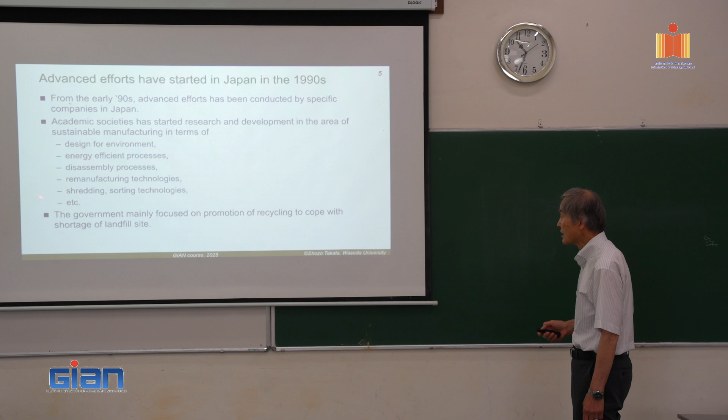This is just some of the history, but I started this research work in this field through the presentation of Professor Alting. He is a professor at the Technical University of Denmark, and he made a very interesting presentation in 1993 at CIRP, the International Academy of Production Engineering, titled 'The Life Cycle Concept as a Basis for Sustainable Industrial Production.'

He stressed the importance of the life cycle approach, which implies that products are planned and developed for all life cycle phases: production, distribution, use, and disposal, before production and marketing. This is the same concept as I told you in terms of life cycle development or life cycle planning on Monday, and this presentation was quite inspiring.

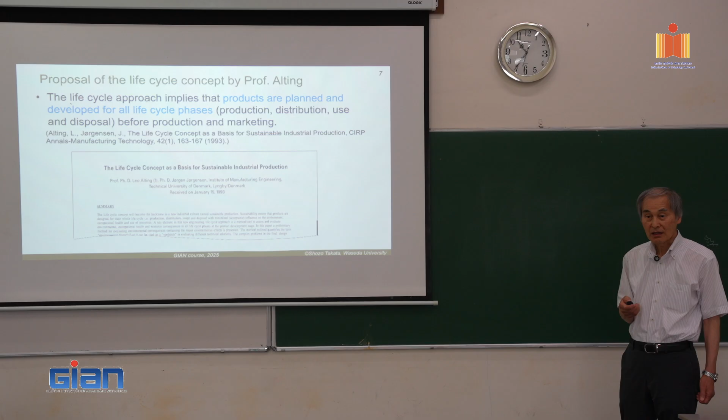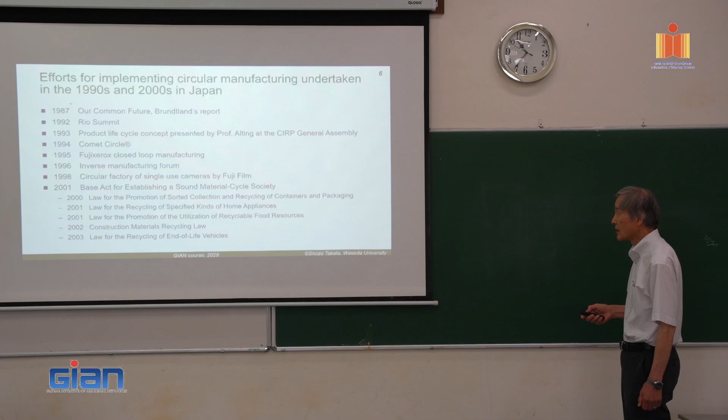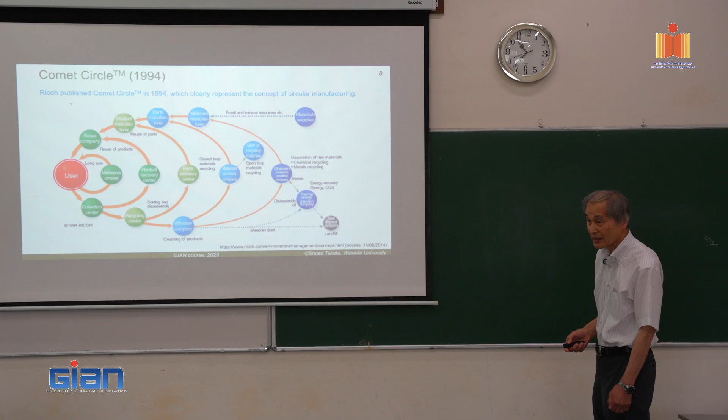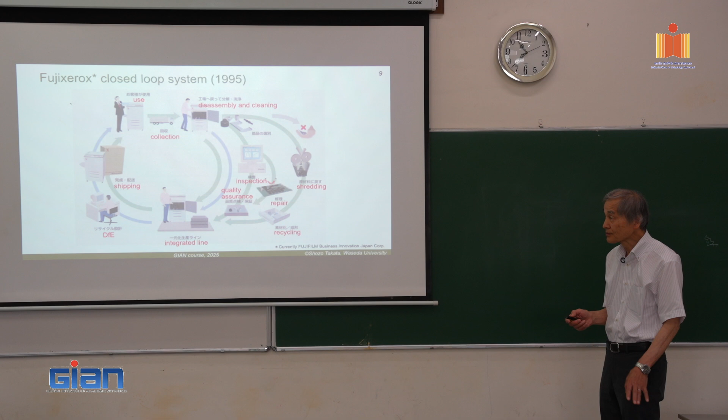Also, already in 1995, I showed this chart already, but Fuji Xerox started to reuse the parts used for producing new products. And in the area of research institutions or universities, the so-called Inverse Manufacturing Forum started in 1995 in Japan.

Inverse manufacturing means you put an inverse path in addition to the forward path - the same concept as the linear process, where you add a return process to make the loop. In this Inverse Manufacturing Forum, we conducted a lot of research works, such as design for environment and so on, as I told you already.

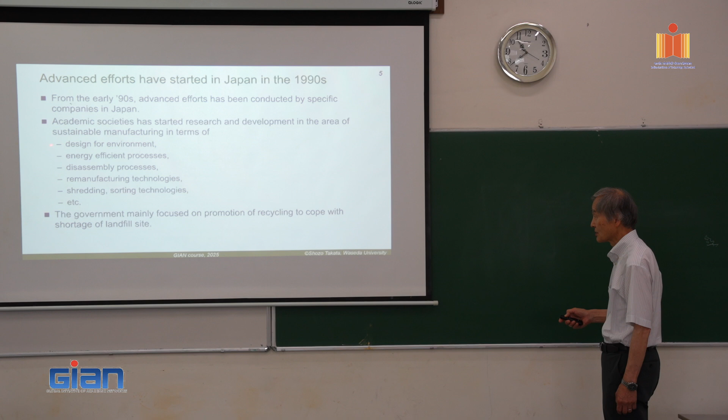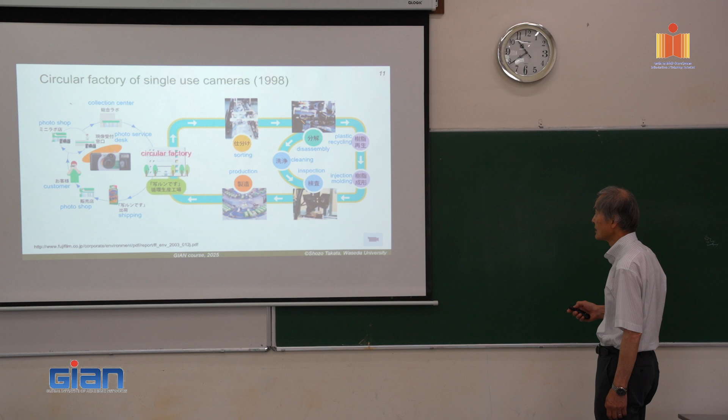This also, I showed this chart already. This is the example of the single-use camera, and the automatic recycling or reuse manufacturing factory was established in 1998.

In industry or in the academic field, we didn't only think about recycling but also reuse. So we said that 3R is a very important concept: reduce, reuse, and recycling, as you know.

But the most important issue at that time for the Japanese government was the shortage of final landfill sites. This shows the final disposal volume for 1980, 1990, with 1991 as the peak. In this period, the final disposal volume increased quite steadily. The problem was that the remaining years of the final landfill site at that time, in 1990, was only 1 year or 1.5 years.

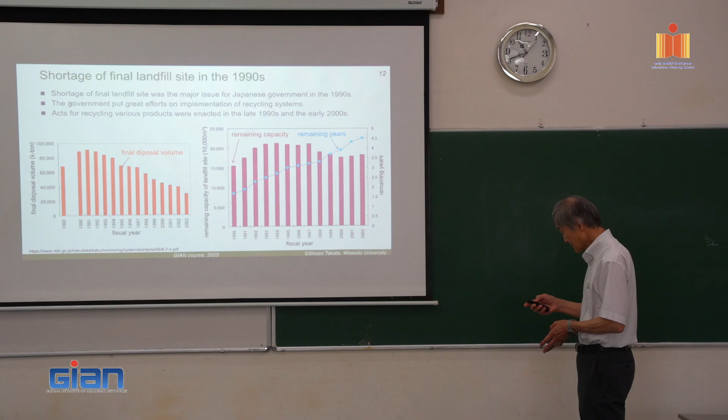This was a very serious situation at the time. Therefore, the Japanese government put a lot of effort into reducing the amount of disposal and saving the landfill site. For this reason, the Japanese government established a legal system called the Sound Material Cycle Society.

What they made was the legal system of material recycling. They set different kinds of acts, such as the Containers and Packaging Recycling Act, Home Appliance Recycling Act, Food Recycling Act, Construction Recycling Act, Automobile Recycling Act, and Small Home Appliance Recycling Act. These were established in the late 1990s or early 2000s.

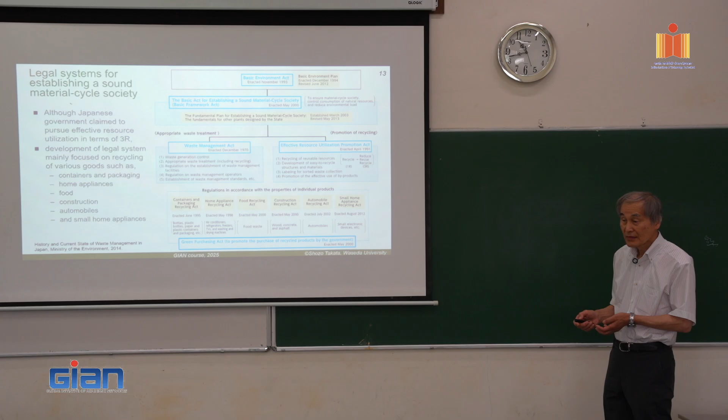So this is a chart explaining what the Home Appliance Recycling Act is. This act applies to what we call white appliances, including air conditioners, refrigerators, washing machines, and TVs.

The system works in this way: the consumer has to buy a so-called recycling ticket from the retailers. That means when they discard their appliances, they need to buy a recycling ticket and ask to take their machines. For these four appliances, almost all households have a TV, air conditioner, washing machine, and refrigerator.

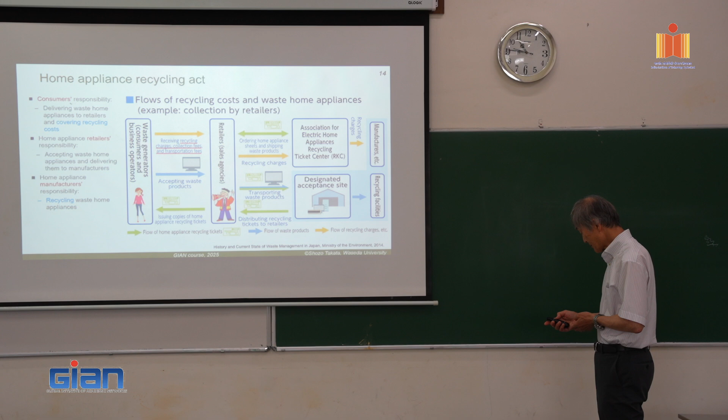Before the start of this system, a pilot recycling plant had been established to test the way of recycling such things as refrigerators and so on.

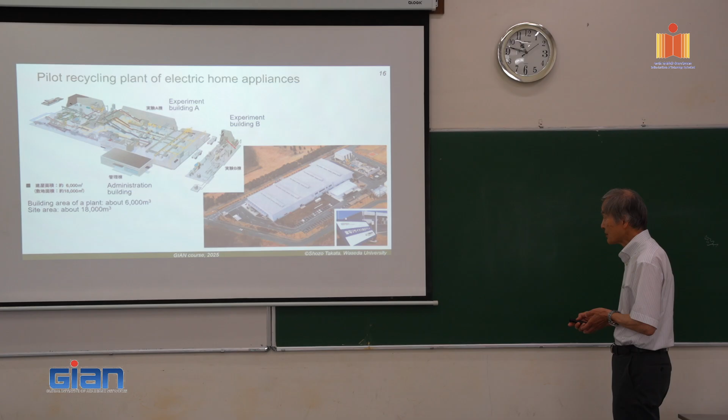So these are pictures of one of the recycling plants. For example, this is a quite old LCD TV, and the design was not so well suited for disassembly. There are so many screws, but they had to unscrew every one and take out the hard disk. This kind of circuit board contains precious metals, so it has to be recycled separately from the covers made of plastics and so on.

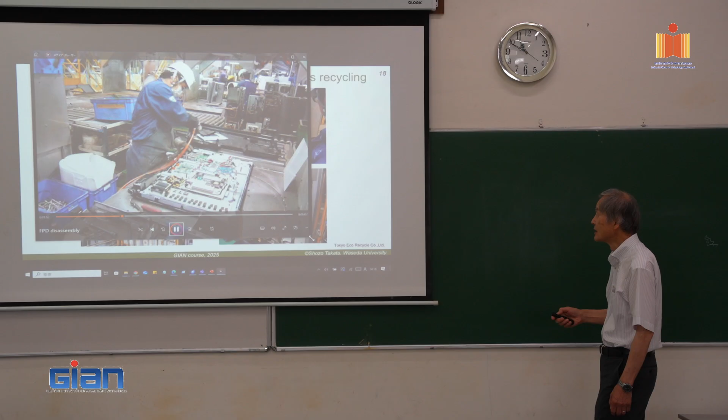This video is a bit old, so nowadays the new machines are disassembled differently, and some companies have developed automatic disassembly systems using robots. The robot recognizes the screws and unscrews them automatically. There were so many circuits and electronic components inside the TV at that time.

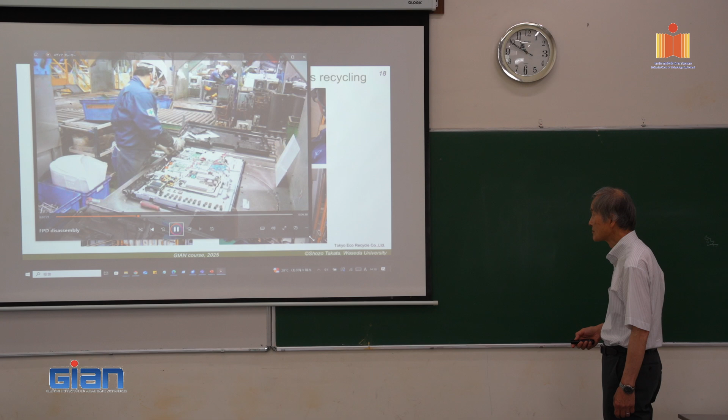Sorting is quite important for recycling. If you sort very well, then you can get more useful material.

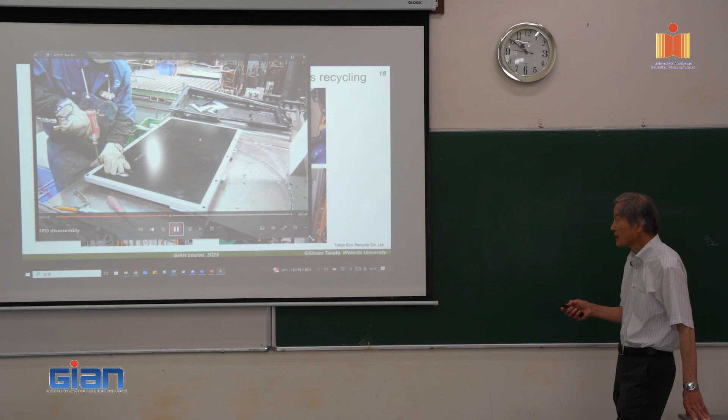You know that at that time the backlight of the TV was not LED, but used this kind of light - fluorescent lamp, how do you say it...

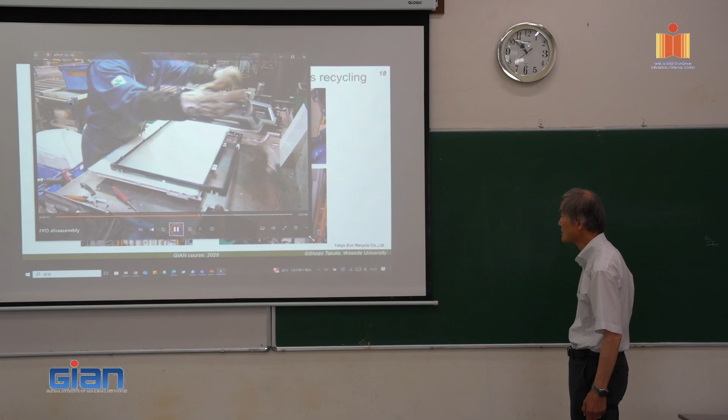These are the lights, very thin. I don't know the English word, sorry, but this kind of light. Nowadays TVs don't have this kind of light - LED is used for that purpose instead.

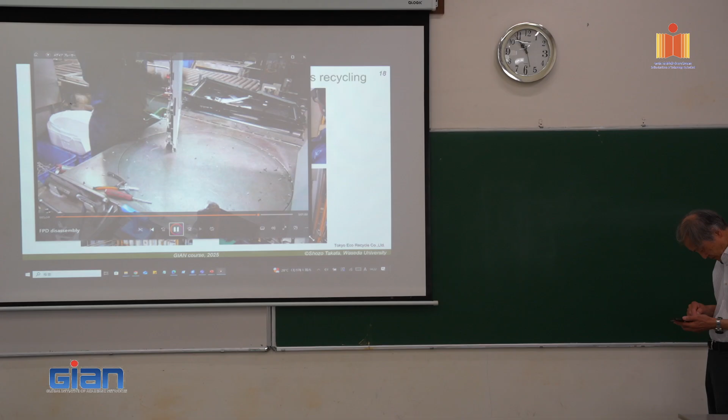Fluorescent lamps. Okay.

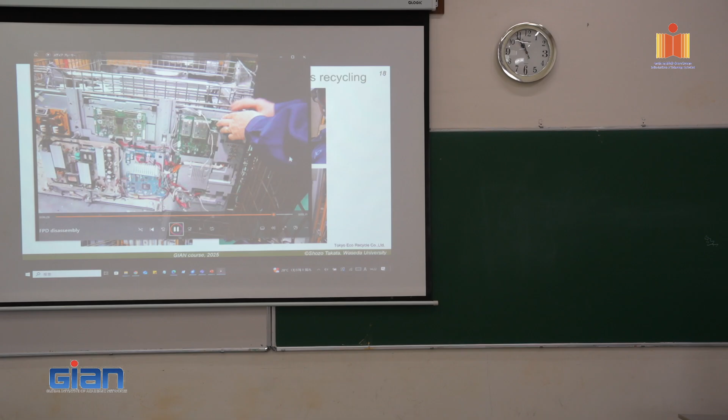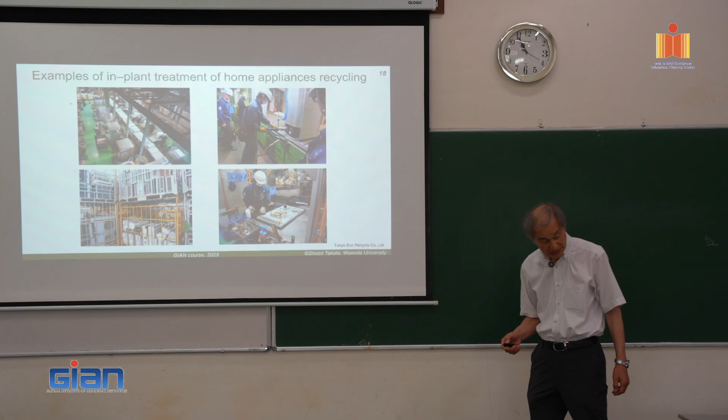In this case, you have to pay the recycling fee when you buy your car. The money is deposited, and then at the end of the car's life, there is a certain institution that reserves the money, and the manufacturer should recycle the car and can get the money from that control institution for this purpose.

So the way of paying is different from the case of home appliances - I don't know the exact reason why. One is paid first, and the other is when it's discarded. But anyhow, the system is a bit different between them.

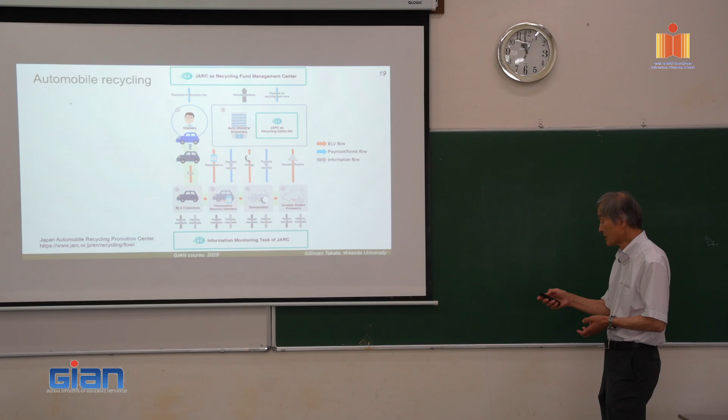So by these efforts, the total generated waste and waste generated per person per day decreases significantly in these days. So nowadays, we could solve the shortage of the landfill area in Japan.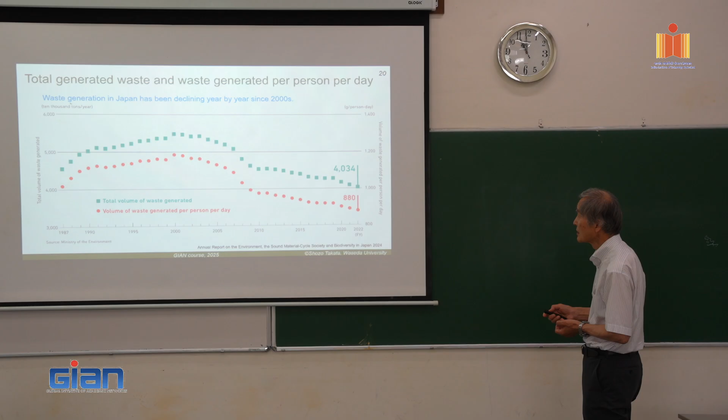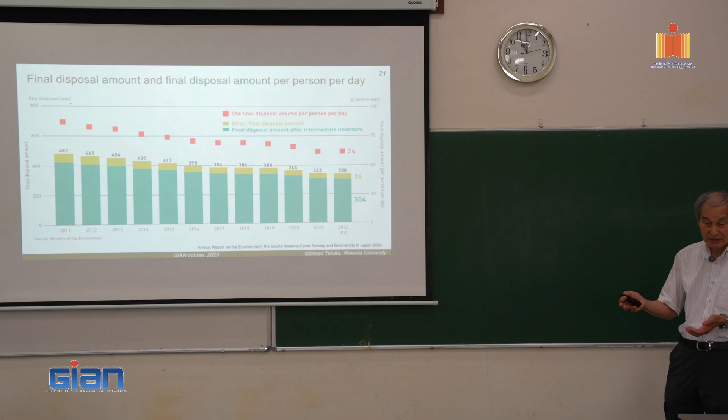This shows the final disposal amount and the final disposal amount per person per day. That was the total generated waste, and this is the final disposal amount. But anyhow, both are decreased significantly thanks to the effort to introduce the recycling laws.

But the efforts of introducing circular manufacturing or material circulation in Japan has already achieved, although Japan has achieved a significant reduction of waste, our effort toward 3R has stagnated in the late 2000s and early 2010s.

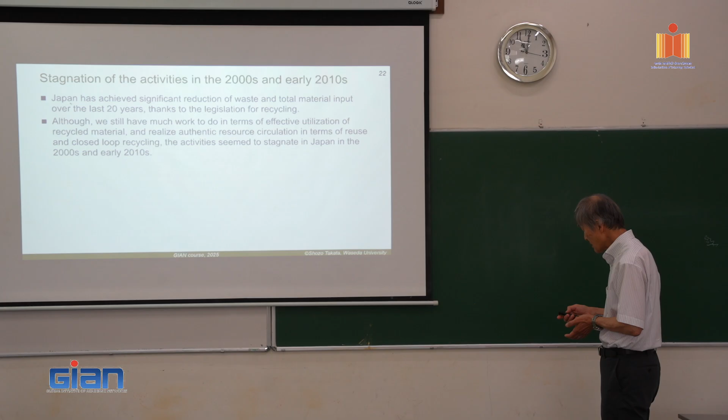Maybe the reason was that the concept of 3R and circular manufacturing had been successfully implemented in several types of products, such as single-use cameras, copiers, and construction machines in the 90s. Such advanced effort on circular manufacturing has not spread widely in Japan after that.

The reason why the above-mentioned examples have been successful in implementing circular manufacturing is that their businesses originally incorporated characteristics suitable for circularity.

So, about the single-use camera, I already told you that the product automatically comes back to the shops, and the shops can send the collected cameras to the factory.

And also, in the case of the copier, maintenance is quite important to maintain the quality of the copy. So that is one important characteristic of this kind of product.

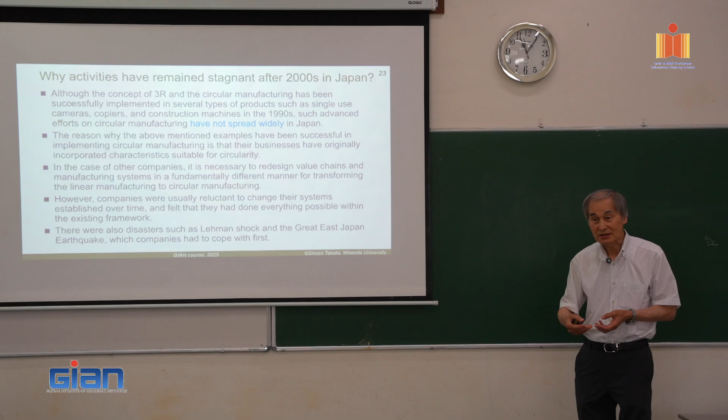And maybe there are also disasters such as the Lehman shock or the Great East Japan earthquake, which companies had to cope with first.

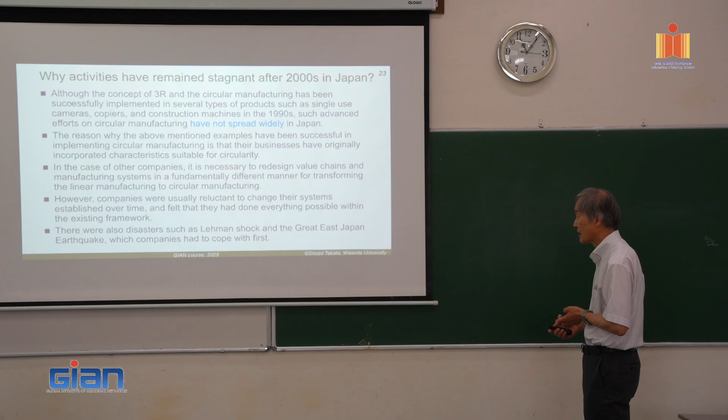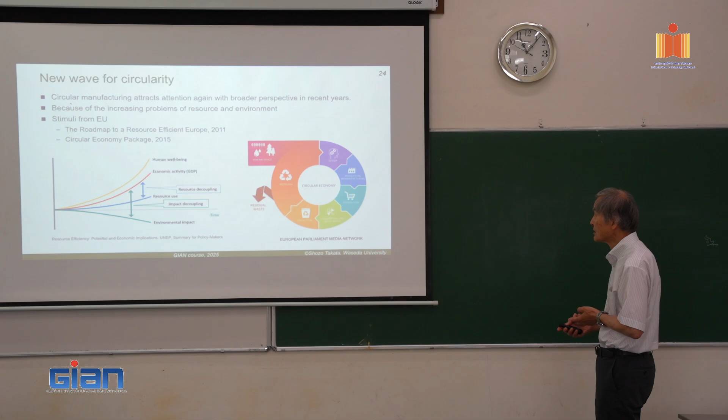But as you know, in 2015, the EU proposed the so-called circular economy, and they are claiming that decoupling is quite important for us. And this changed the mood of companies in Japan.

For example, in October 2020, the Japanese Prime Minister declared Japan's aim to reduce GHG emissions to net zero by 2050. This declaration brought a change of mood in Japanese industry. Companies are trying to make various efforts to contribute to the reduction of carbon footprint and resource consumption.

Although many companies begin to understand that they need to change their business models and value chains to introduce circularity, unfortunately, they are still struggling to find a way to transform their businesses.

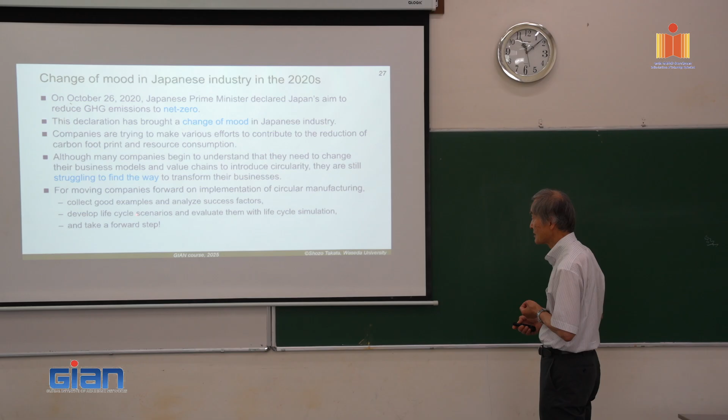For moving companies forward on implementation of circular manufacturing, we collect good examples and analyze successful factors. You need to learn from the good examples or cases, analyze successful factors, develop life cycle scenarios, and evaluate them with life cycle simulation, and take a forward step. So these are our hopes, but for many companies it is still not an easy path.

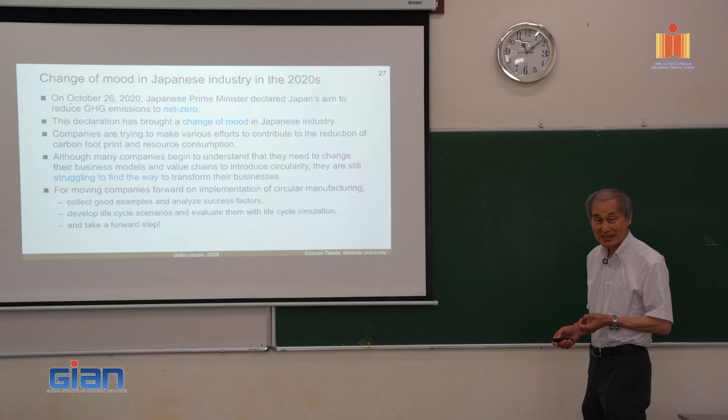Okay, so this is just a current situation in Japan, some material data. If you look at the material flow in Japan, this is 2000 data, and this is 2021 data. The total material input, including everything, reduced by 33% from 2000 to 2021.

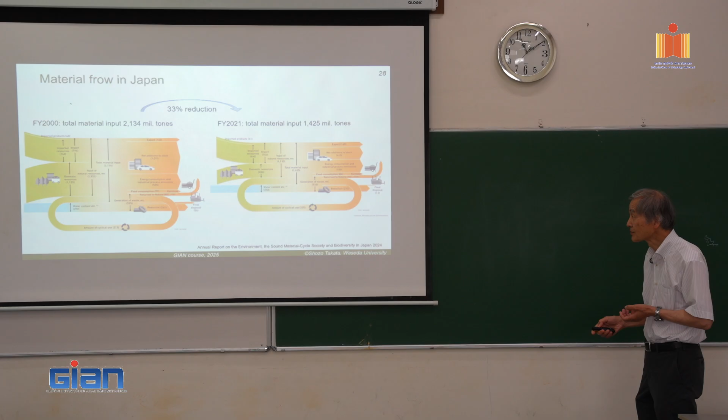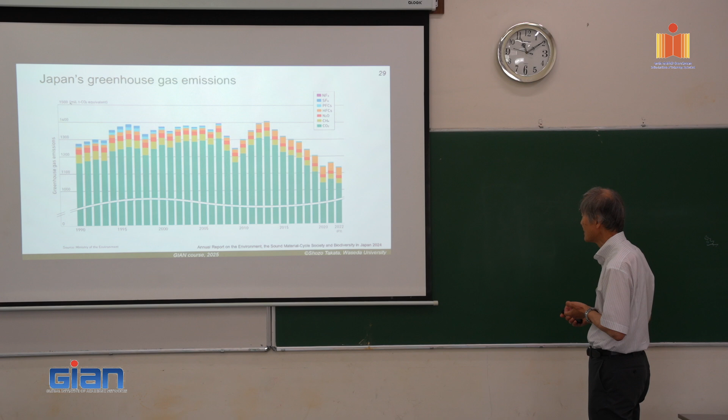If you look at the GHG emission, we could also reduce it significantly in these days. Energy-related CO2 emission by sectors: if you look at the industry sector, they made a lot of effort to reduce the energy-related emission. But the transport sector, the commercial and other sectors, the residential sectors, and the energy conversion sectors are still not so successful in reducing CO2 emissions.

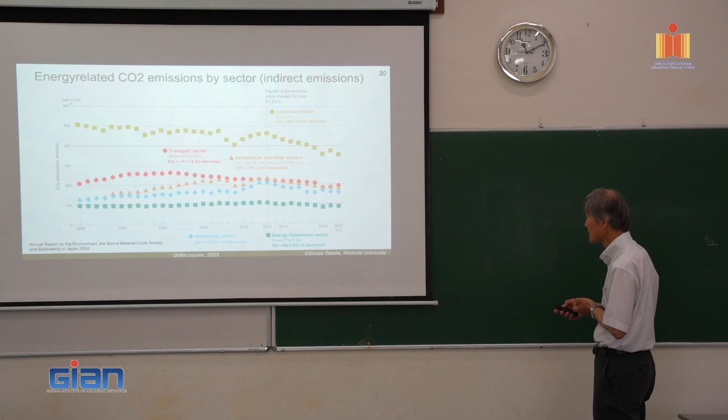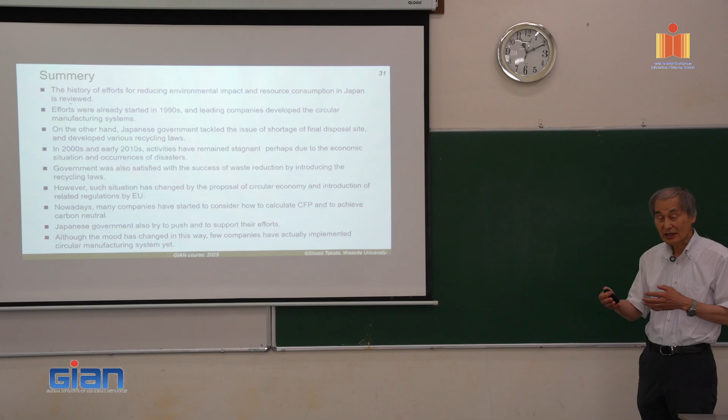So what I want to say is that in general, we made a lot of effort, and from certain aspects we are successful in reducing waste, reducing CO2 emissions, and so on. But still we need more effort to introduce circular manufacturing to cope with resource depletion and global warming.

So in summary, the history of effort for reducing environmental impact and resource consumption in Japan is reviewed. Efforts already started in the 1990s, so it is not a new issue. It's not old, but a long-term issue. Leading companies developed circular manufacturing systems quite successfully. On the other hand, the Japanese government tackled the issue of shortage of final disposal sites and developed various recycling laws.

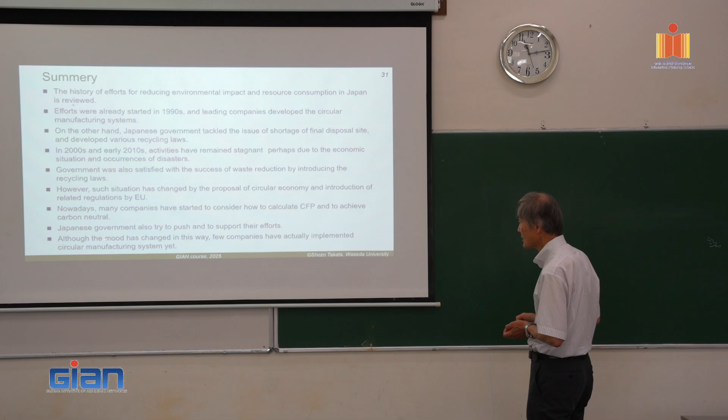However, this situation changed with the proposal of circular economy and the introduction of related regulations by the EU. Nowadays, many companies have started to consider how to calculate carbon footprint and achieve carbon neutrality. The Japanese government also tried to push and support their effort. Although the mood has changed in this way, few companies have actually implemented circular manufacturing systems yet, so we need more effort.

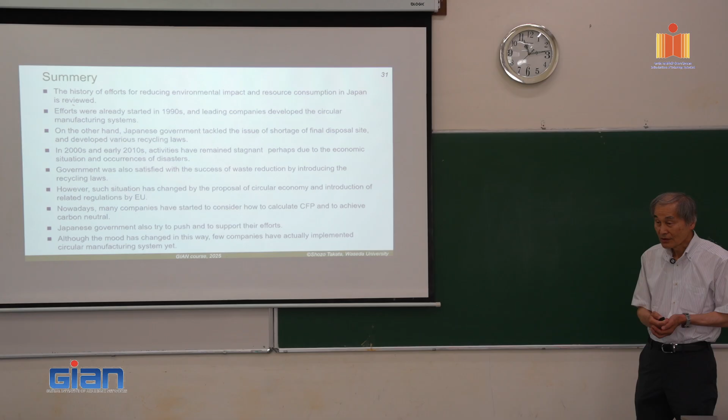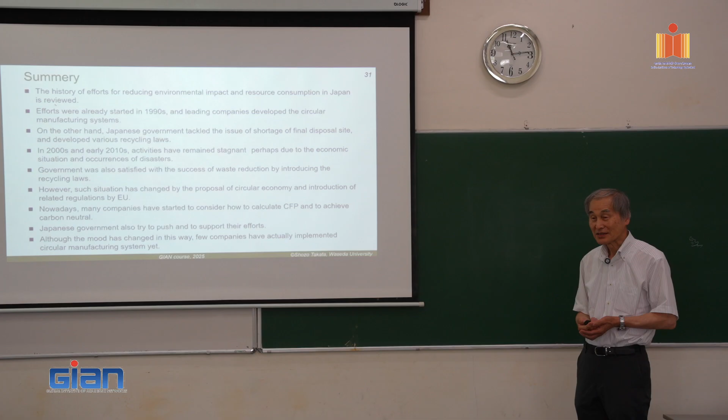Okay, with this I'll stop my presentation, and I appreciate your attendance to this course and for giving me a chance to explain circular manufacturing from different aspects. Thank you very much.

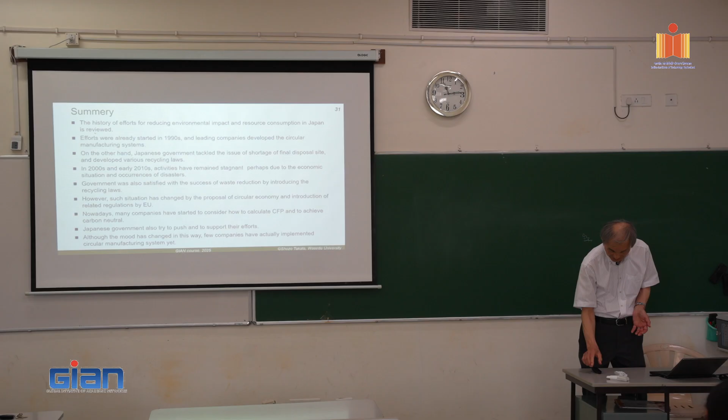Though I don't have a question, I want to add something. There is one more complementary model known as the donut economic model, introduced by Kate Raworth. Donut economic model. So one more model, the donut model. We have the circular model, and a complementary model, the donut model, was introduced by Kate Raworth. She is a research scientist and economist from Oxford University.

In the circular system, we have to reuse resources, reduce, and close the loop. But in addition to that, you also have to keep in mind the well-being of human beings. So two things are kept in mind: well-being of human beings plus the well-being of the environment. That is the concept of decoupling. It's a complementary model, also known as the regenerative economic model.